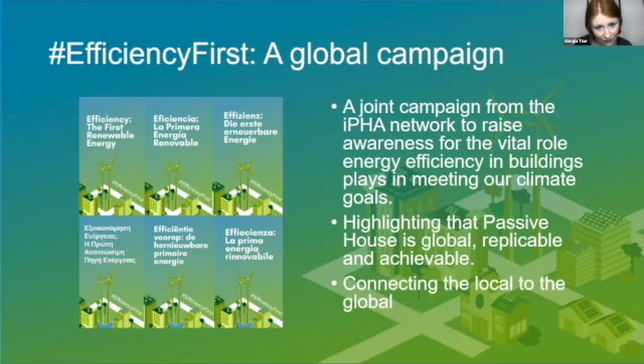The second part of the campaign was released in March, and it is the Efficiency First pamphlet, which details the benefits of Passive House, why we should think efficiency first when tackling building projects, and the ways in which an efficiency first approach provides a pathway to meeting our climate goals.

It is available, like all of the aspects of this campaign, in multiple languages as well as regional editions. So there are editions, for example, for NAPHN, and you can find your local pamphlet on your affiliate organization's website or via the dedicated section on our website.

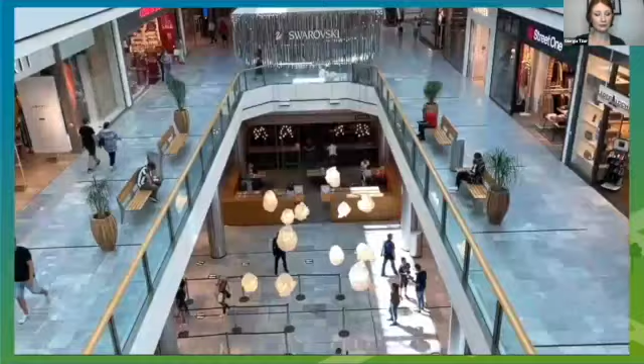Buildings. They play a huge role in our day-to-day lives. From the familiarity of your family home to the office you share with colleagues, the restaurants, cinemas, swimming pools, and entertainment facilities where we spend our free time, to the hospitals and care facilities looking out for our health, and the schools and universities where future generations are educated. Buildings impact our world. Yet today's buildings also impact nature in ways that threaten our collective future.

Thankfully, achieving better, more sustainable buildings is within reach. By putting energy efficiency first, the Passive House Standard reduces heating and cooling demand by up to 90% compared to conventional builds. This ensures comfort, health, sustainability, and savings. Passive house buildings are dynamic, affordable, resilient, and stand the test of time. Buildings impact our lives and our climate, and it is high time to make our indoor environment sustainable for our outdoor one. Efficiency is the first renewable energy, and Passive House is proven to deliver.

So, as I mentioned, you can find these videos in a range of languages, including Mandarin, French, Spanish, Portuguese, and there are more underway. So finally, the activities and events as part of this campaign are planned throughout 2021, and we have plenty to look forward to, including some university posters for different faculties to attract students to better building while they're still at their pre-professional stage, a sticker campaign, many events.

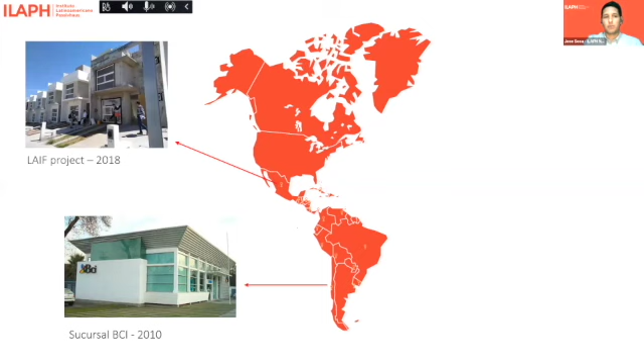We are basically trying to decarbonize edification in Latin America. We're trying to bring this to the forefront. In the continent, we know we have a lot of stuff happening in North America, but there is a lot of stuff happening actually down there. We have the first Passive House certified project in Chile in 2010. From there, we go to LAIF project in Mexico in 2018. We had the first hot and dry climate Passive House certified in Brazil.

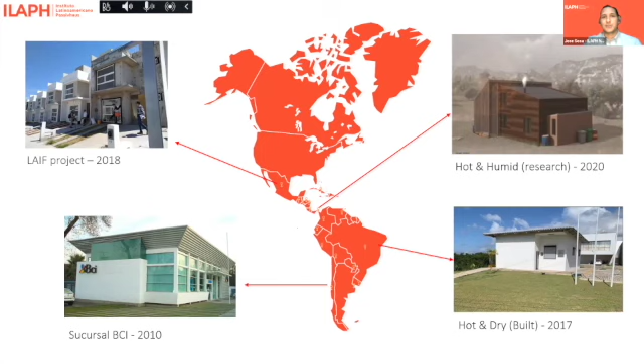And as of 2020, we had one in hot and humid climates in Colombia, which is right now a research project, but it actually proved that it can be done. And this has all natural materials. There's no manufactured material for insulation or any of that stuff. So a lot of good stuff happening right now down south. And from there, we go to our conference, which is merging sustainable development goals and the Passive House standard. And we wanted to touch on a couple of things, which I'm going to let Juan Manuel talk about.

Okay, thank you, Zach, for the invitation. And it's really good to hear your Spanish pronunciation. It's great.

So we have a special guest, a keynote speaker at our meeting. He's very well known by you. I know I heard some people from Santa Fe, New Mexico here in this meeting. And this is a cover of Edward Mazria from October 2003. I really liked this when I first saw this picture because it's searching for a very strong impact in what he's saying. So we have invited him.

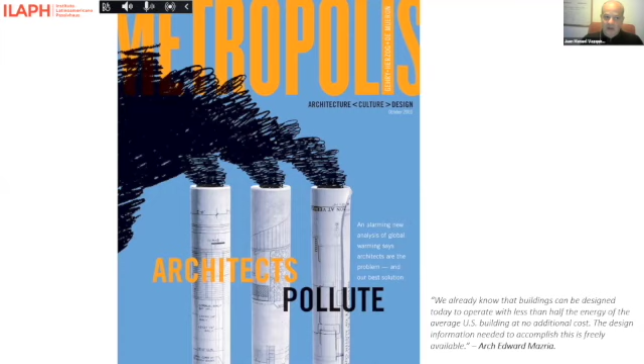The point is that Passive House is not a very known language in Latin America. So we want to match Passive House with the SDGs, the Sustainable Development Goals. So the main message from our conference is that you cannot achieve the SDGs without a substantial change in the construction industry. So that's what we are going to work on. And then to match all the SDGs with the Passive House standard, like the people from Spain talking about their huge work in schools and CO2 measures in schools.

And then we also have people that have maybe nothing to do with Passive House, but for us, a lot to do with Passive House, people from a university in the US, Drexel University in Pennsylvania. They did huge work in the last 4 years on SALURBAL, that is Salud Urbana en America Latina, urban health in Latin America. It's a very incredible project, because really we are living very differently from how Europe is living. We have many poor people here, many slums in Latin American countries. We have a very special social and economic situation that grips all our countries.

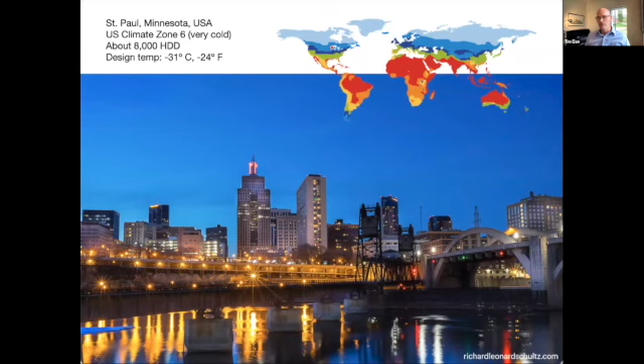A little bit about the location itself. We got a very unique site from our clients. We're in the urban core, but overlooking a park, a golf course, a conservatory from a high point that faces south and west. This doesn't happen very often in the urban core, that you get a view. So we actually, in the distance, get to look at the conservatory itself.

The site is odd shaped and has quite a bit of elevation to it. A narrow side access on the east opens up to the west with great views. A home was taken down that was in disrepair, but that happened before we really got to the site, so it didn't really play a role here. The location for the house could only be moved a few feet back and forth due to setbacks.

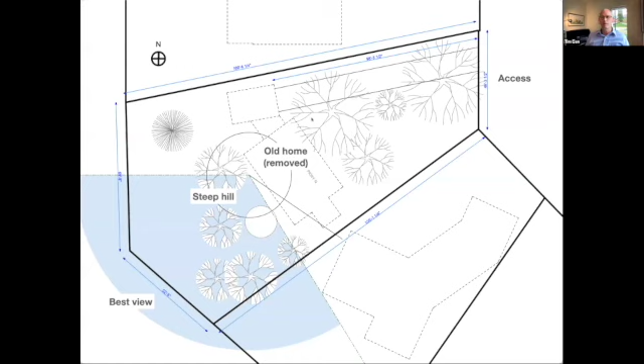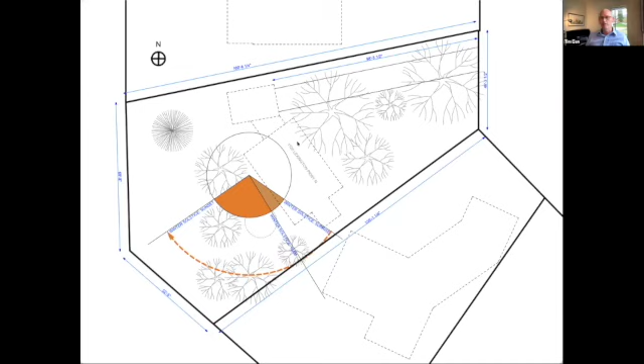An analysis showed we had great sun exposure on site, so we were fit for active and passive solar, both big cornerstones of this project. A quick preview of where we ended up, the southwest corner of the building. We have an open space on the second floor and lots of glass on the first floor, even in this cold climate zone. You can see we can allow ourselves some of these luxuries and really take in what needs to be taken in.

Our clients gave us a great list of ideals of things they wanted to achieve. The views I talked about, accessibility became another big piece for them. They want to age in this building, so it had to be fully accessible on both floors: healthy interior, sustainable resources, energy conservation, comfort, low embodied carbon, and also huge proponents of pollinator gardens. So sustainable landscaping was a big piece of this puzzle as well.

I'll give you a quick rundown of the layout. We approached from the east. The garage had to go street side for practical purposes. You can walk around the garage. There's a joint entry area for both buildings from there, coming into a large welcome entry area that opens into the kitchen and then later the great room.

The focus of this house from the first moment you set foot in the door is always out the southwest corner on both floors, so you get to enjoy the view that is offered. We have a small outdoor space, a guest room, and a mudroom, which is something Minnesotans have - a secondary entry, particularly for winter or gardening season, where you can shed all the wet and dirty and get into your clean.

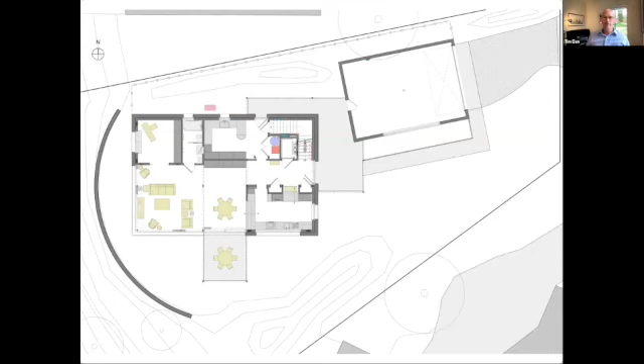Quick impression: the front door in the background, open living space, the kitchen in the corner here, and the living room corner looking out, this time in the winter.

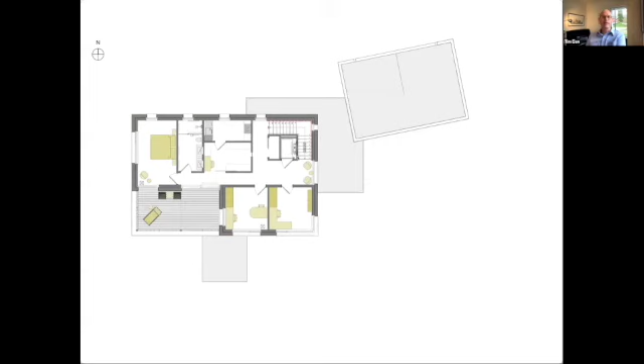On the second floor, we're coming upstairs. We have an elevator in the building for accessibility. This was built for just two offices and a master suite, again, with a main focus on the southwest, taking advantage of light and view on this floor as well.

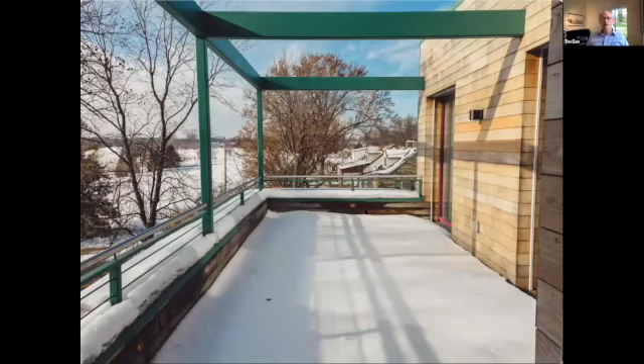Some quick impressions as you come up to the second floor. There's a corridor connecting the more public second floor spaces with the private ones with a lift and slide door, with a view out onto a patio or deck area from which, in all seasons, you can take in the view.

Let me tell you a little bit about how we make passive houses in Minnesota in our cold climate zone, and especially this Passive House Plus. It all starts, of course, with a really good building envelope.

I put the R factors here. I'm not going to rattle off the entire list, we can talk about that more perhaps after, but we have significant R values that we're dealing with. This is a wood frame construction with a double stud wall, cellulose insulated. The roof is a low slope roof, fully cellulose insulated. R values in the 50s in the wall, over 70 in the roof. The entire foundation slab area is insulated with EPS foam, and even in the grade, we're looking at R values of 16 going up into the 30s. These would be very typical numbers for a cold climate passive house in our area.

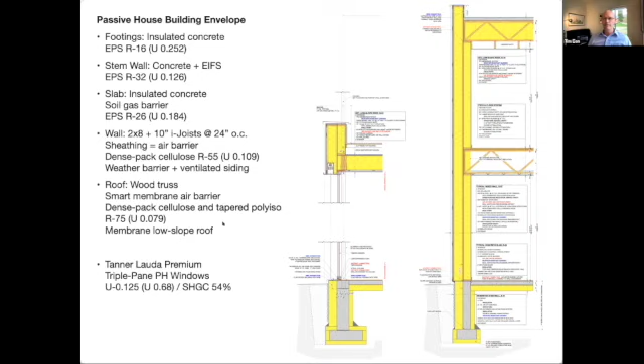And the windows are, of course, passive house windows with a very low U factor of about 0.125, all things considered, and a solar heat gain of over 50%. That's really powerful for us because we really heat the passive house with the solar heat gain. I'll show you some images of how that was all put together.

It all starts with the proper foundation, and for us, all of our buildings sit on foam, or on insulation I should say, and foam is the most readily available and suitable product for engineering in our area. You can see the EPS slabs laying down and then the footer itself being built right over the top of it. The insulation is already put onto the footing here, so both sides have 4-inch EPS cladding.

We've actually learned also, or some of our builders have, that the foam gets so rigid that we don't really need form work anymore. We just form the concrete in foam.

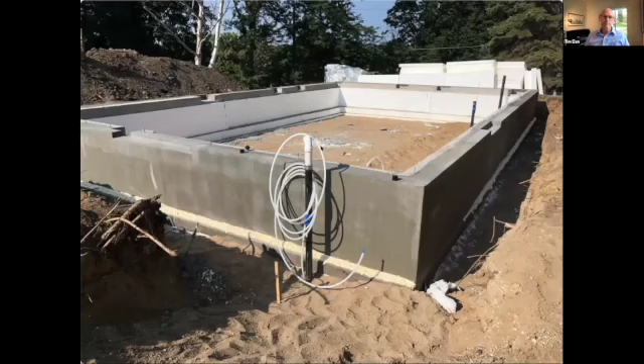From there, we have stem walls. This building had some architectural excitement and some structural excitement, so it was built in sideboard concrete, which is entirely clad with an EIFS system on the exterior for waterproofing. That EPS package basically guarantees that we have zero thermal bridges. All structural components are entirely mounted on the warm side of that setup.

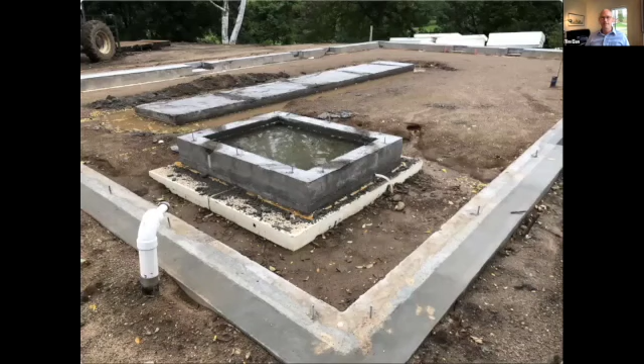As we come out of the grade, even the intermediate footing, unfortunately that got flooded in this picture here, but that is sitting on foam, and the elevator core and elevator underrun is also sitting on foam. Later, the slab is, of course, sitting on foam as well.

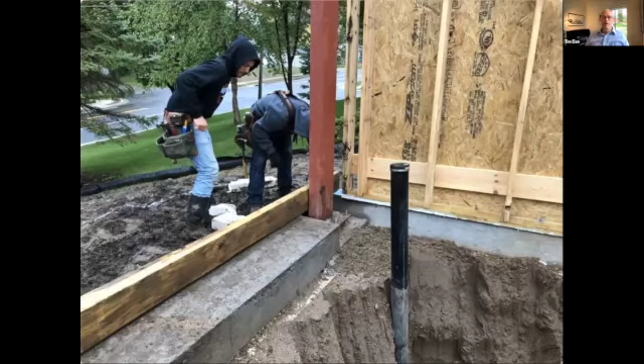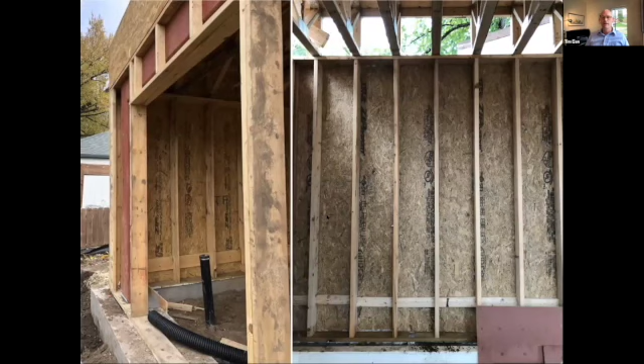Here's a quick detail shot that shows you a steel moment frame that we had to put into this building. There's lots of glass, so we had to create some rigidity with steel. But again, this is sitting on top of the concrete on the interior of the EIFS system, so completely thermally disconnected from the exterior. And a couple of impressions of how that comes together.

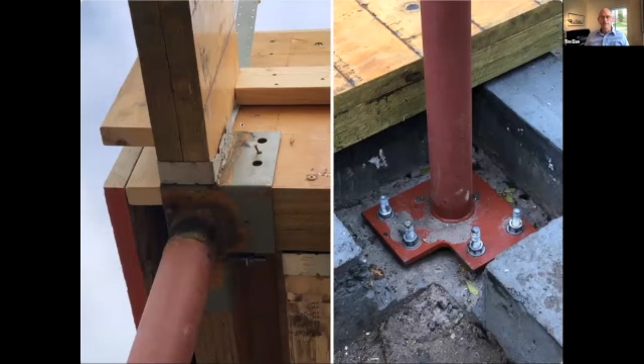The steel frame was entirely buried in the wood frame, and then everything was over insulated with a secondary layer, so there again, no thermal bridging from the steel construction. Here you can see these columns again, entirely on the warm side.

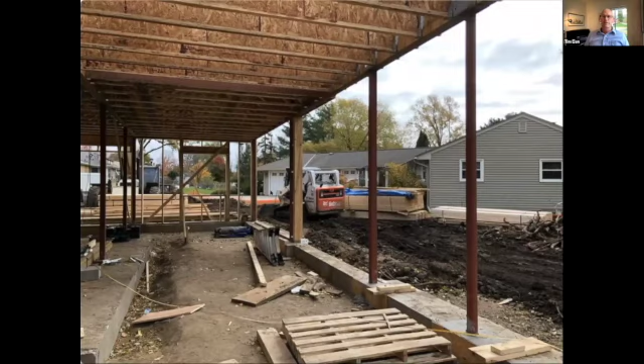This is an overview of where the storefront or glass facade was later set. So you can see we're transitioning to a steel frame there.

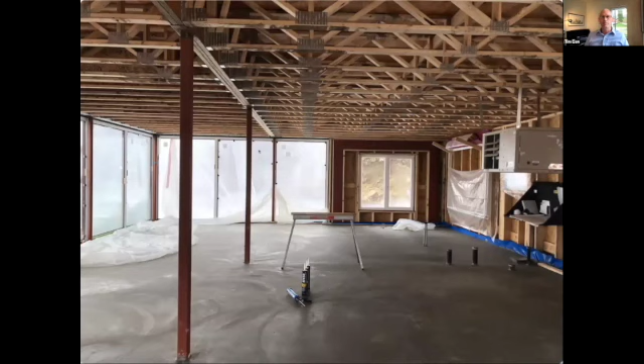As I said, the slab itself is also fully insulated. There's 8 inches of foam down there, then a soil gas barrier. Everything's taped up and then put together at the window location or at the wall location. Everything connects up. This took a lot of planning to make sure that it was thermally broken or thermal bridge free. You could see some of our sketches here.

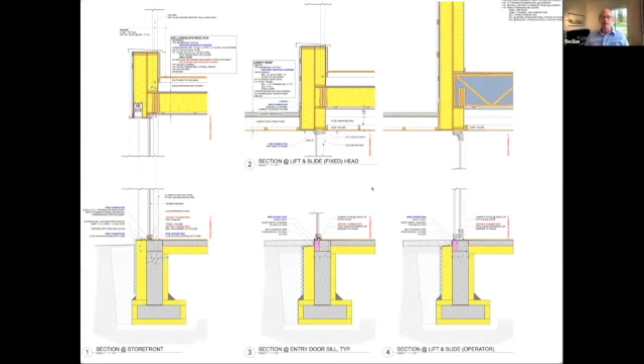The facade itself had to be detailed in multiple places. We even have little compact foam pieces that guarantee that the edges of the slabs are completely disconnected from the outside where the windows are placed.

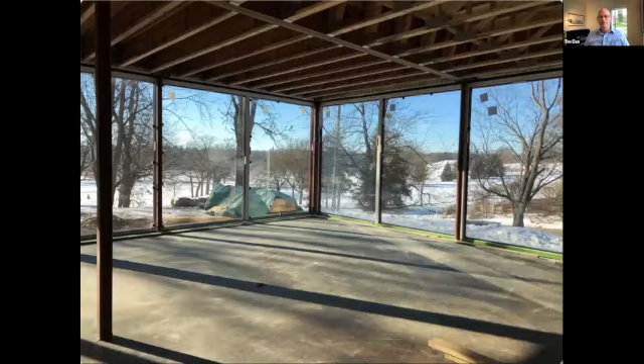Here you can see them in place, and the first time that the view and that space really started to emerge was once they were put in.

A conventional window also needs good detailing. We offer exterior motorized shades as a control mechanism for the sun, so we have to spend a lot of time detailing exactly how to do that. Our secondary skin, our I-joist layer, is the place where those go - they're completely hidden, you don't see them until they come out.

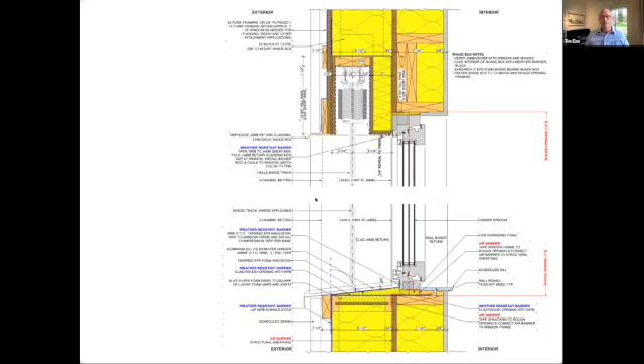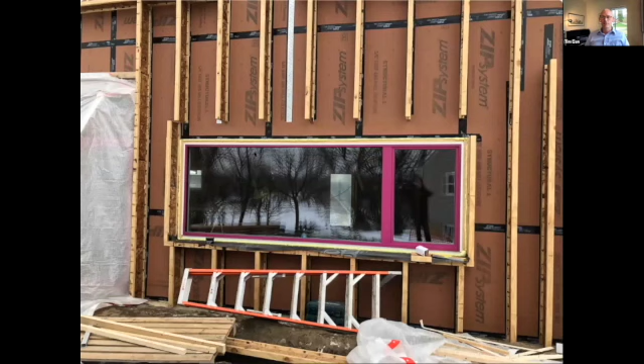Quick impression again of the double wall frame with some air sealing at the jamb before the window is inserted. Here's a kitchen window being placed into that layer, and then finally the shot of the window being in there. This is a great example because in this photo you see the window installed in the airtight frame itself, but you can also see the I-joist starting to come in to create the secondary wall cavity, and the space above the window would later be fitted out with that shade retraction box.

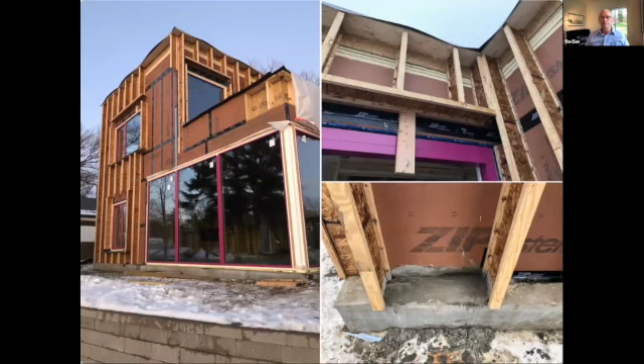A few more details here. Our foundation walls again have EPS on the exterior, so we have a transition from there to the wood system. And we're using Huber zip sheathing here with its tape as an air barrier and a vapor retarder.

So a hard sheathing that's in the middle of the wall is great in a cold climate, because people don't bust through it every time they hang a picture on the wall.

The air sealing obviously plays a huge role for us, as it does for any passive house construction. So transitioning from the wall sheathing in the ceilings, we were using Intello membranes. These would also be used to dense pack through in the roof system itself, and as you can see, great care was taken in the build out to make sure that there aren't any gaps in that system.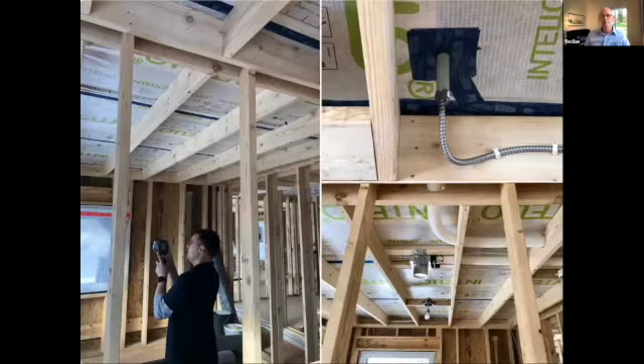Just a couple more impressions. Now the exterior walls are starting to be completed with the weather barrier, through which then the insulation for the secondary layer was installed. You can see one of those shade boxes installed on top of a window, and furring framing for the ventilated siding package, which then really completes the wall itself.

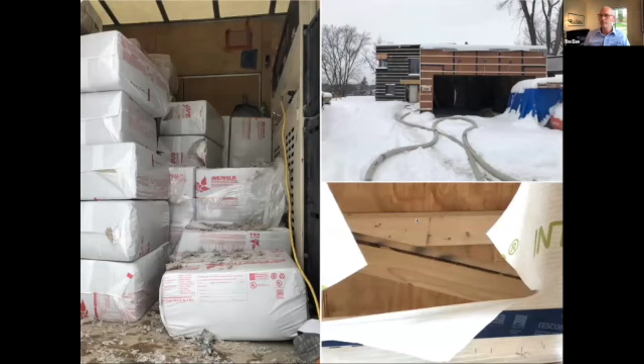And then comes insulation, lots and lots and lots of insulation. We have a reputation in town now with people who work on our projects, because we use truckloads of cellulose. It's not uncommon that there's 3 or 4 trucks showing up on the day of insulation, and then you get a spaghetti of hoses for the dense packing, which run into the building.

Some of the precious air barrier has to be cut, especially in the roof sometimes, to get access and pack it properly. Of course all of that is being patched together again with good tapes afterwards, and we test the integrity of that system multiple times.

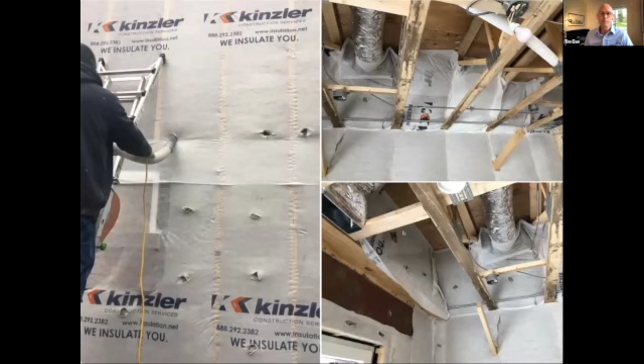Just another impression here, the 2x8 frame was also insulated with cellulose dense pack, and in this case it's simply webbed and then filled, about 4 pounds per cubic foot. That stuff is actually so dense in there - if you ever wondered about that settling, it won't settle. As a matter of fact, you're basically creating a custom batt in situ, so this webbing could theoretically be taken off afterwards and the cellulose would not be able to move.

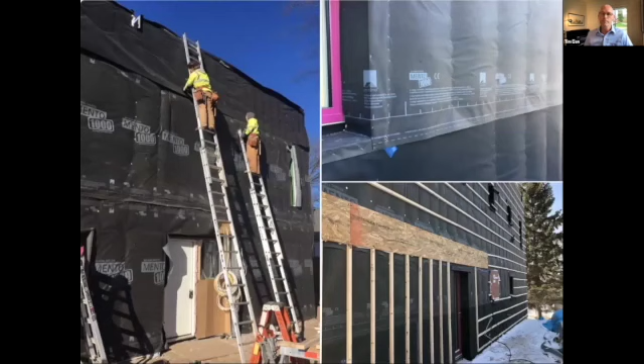On the exterior, the weather barrier is being installed, the furring framing is being installed, and everything's connected up to structural components to the windows, as you can see here. There are ledgers on the building - the structure of this building was quite exciting.

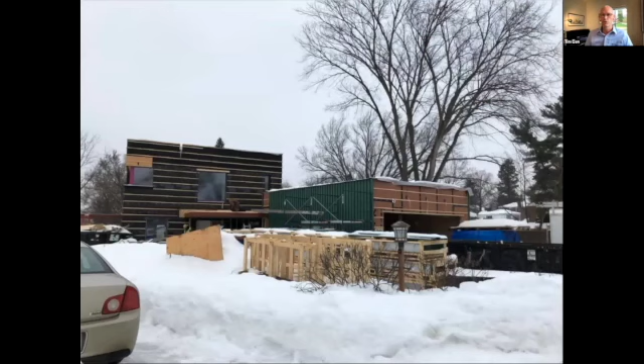We won't be able to get into that in detail today, but we have exterior canopy roofs and things hanging off the building. The point to make here is that everything you see exterior to the building is hung off of the TJIs, the I-joists - it is not connected through to the structural frame. I take some pride in that because that takes quite a bit of detailing and working with the engineer to make that happen, but it guarantees the integrity of the insulation layer. We have no structural members protruding the insulation layers for these canopy roofs, for instance.

Just a couple of progress shots here as it's all coming together - you can see the garage is already being sided. The garage itself isn't that exciting, but it is over-insulated. It's insulated better than a code building in Minnesota would be. It's tempered in the winter - the clients keep it at 50 degrees Fahrenheit through the winter. So we also did a good job there so that it doesn't blow our energy budget.

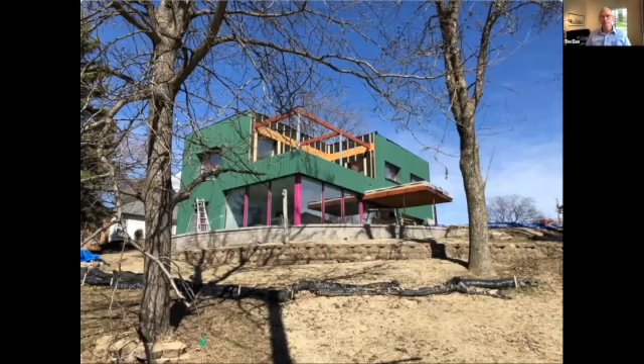And it started to reveal itself for the first time here. You can see the second floor outdoor space is starting to come together. The color scheme emerges. And another quick progress shot with materials being installed.

One thing that's also important to us is using materials responsibly. So steel obviously is great in our parts because it lasts forever, needs little maintenance, and is often from recycled content. And all the wood that you see on the project here is reclaimed ash from a company that harvests diseased trees in our metro area and makes them useful for buildings.

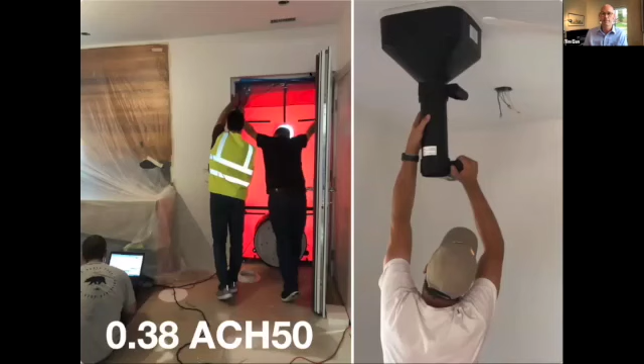So obviously, as Passive House had to go through testing, this one here came in at 0.38 ACH50, which we found is average for our wood frame buildings. And the mechanical system was obviously dialed in as it needs to be. So here you can see somebody measuring a ventilation outlet.

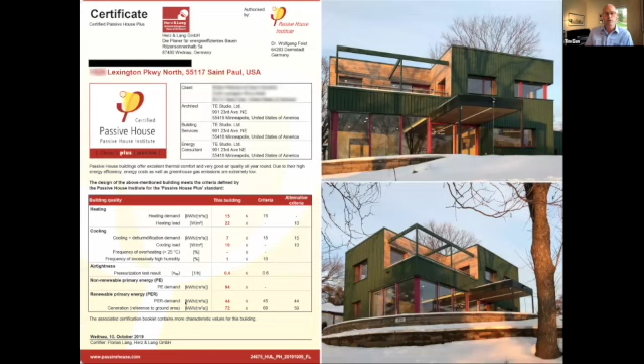So all of that amounted to this wonderful building. We met the Passive House criteria spot on at 15 kilowatt hours per square meter a year for the heating demand. The heat load is always around 20 watts per square meter for us. That's kind of a cold climate conundrum we can talk about later or in another forum. We have enough PV on the roof to meet the PER requirement for Passive House Plus. So just a couple of quick impressions.

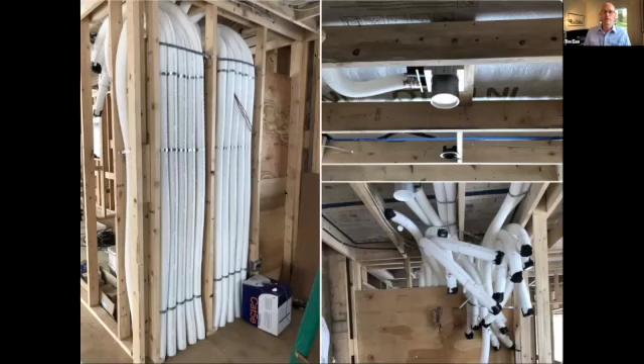I know I'm running a little long here, but I wanted to show you how this all works under the hood on the mechanicals. We have a balanced heat recovery ventilation system with an ERV and a preheater in the building. You can see the rough-in shots here. Most people are probably pretty familiar with these systems now. It's a fully dedicated home run system, 10 pipes coming out, 10 pipes going back.

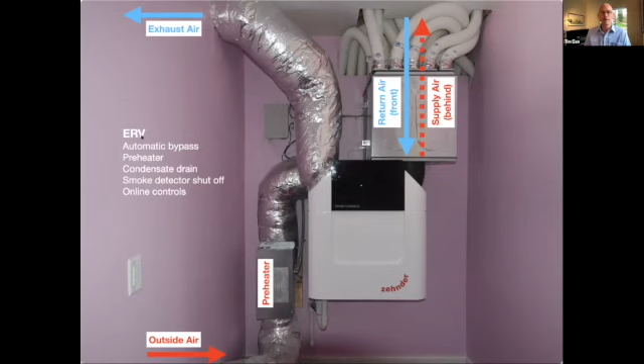We have on this system an external preheater just because the built-in one in the machine was a little undersized for our climate zone. But other than that, it is a fairly out-of-the-box system. I would say the only thing that's unique to us that I haven't heard others do is we have a smoke detector shutoff. So we connect the last leg of the smoke detectors to the system. It's something that our local inspections here make us do. And I think for good reason. It should be more obvious and probably mandated everywhere.

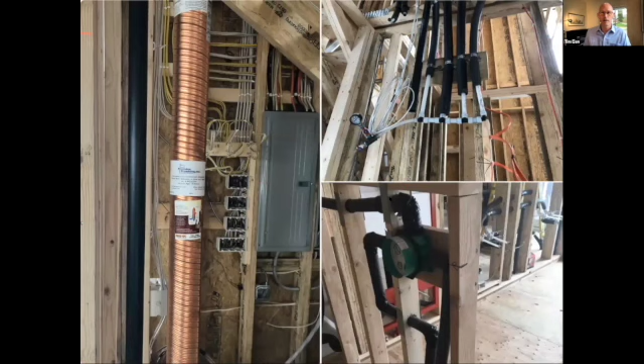On the hot water side, we're using a simple electric resistance hot water tank. There's only 2 people living in the home, so it doesn't really warrant the investment in fancier technology. And we have PV on the roof, and we're using a wastewater heat recovery unit from the 2nd floor, which has the main bathrooms and laundry. So the cold water from the city is pre-warmed by the wastewater as people are taking showers and things like that. And the entire network of piping in the house is end-to-end insulated.

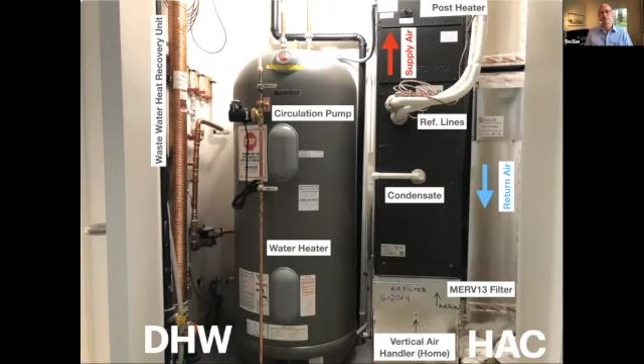Other than that, it's a recirculating system with filtration, very basic. The hot water system, as I mentioned, is just a tanked electric resistance unit. We have a circulation pump for comfort so that the master bath gets hot water quicker. Other than that, it's a very basic system. And then last but not least, we have shades on the building. We do have to control the sun.

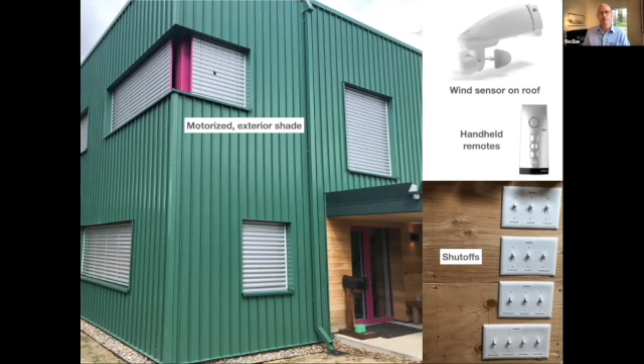These are motorized shades with a manual control, so the clients have remote controls and they can ride them up and down to their heart's content. On other projects, we do that with automation. Here we have a wind sensor shut off just in case when the winds go over 40 miles an hour, the shades retract so that there's no damage.

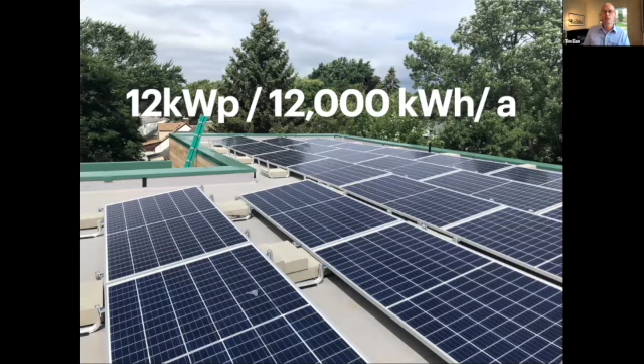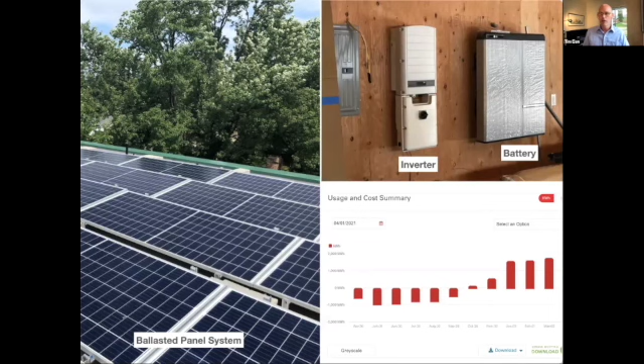And the renewable package tops it off and completes. A 12 kW system on the roof produces, or is slated to produce, about 12,000 kilowatt hours per year. And in the first year of operation, which literally just concluded, we were within 600 kilowatt hours of net zero on this property. There's a little battery too here, but that's really more for power outages. So the net zero goal was just about achieved. The first year is always a year for the garbage bin, and there was still construction going on and whatnot, but it gives us good confidence that the setup, the way it is, meets all the client's expectations.

And with that, I want to thank my clients for hiring us and giving us the opportunity to do right by the environment and create buildings that are awesome like this one. And I want to thank you for your time today and sticking with me. And I look forward to your questions. And I want to remind you that Passive House is always foundational and not just aspirational. And thank you so much. I will take the questions.

Excellent, thank you. Sorry, I just wanted to get the question queue out there because there were a bunch. Harvey's going to stay in the penalty box for a couple, so we'll get to him in a second. So we're going to do one question and then we'll go to Zach. So let's start off with Chris. You had two, so just give us one. And again, there's lots of Chrises out there, so this is the one Chris that doesn't have his location or his or her name. Oh, you can't ask, of course. Okay, so I will do this for you, Chris.